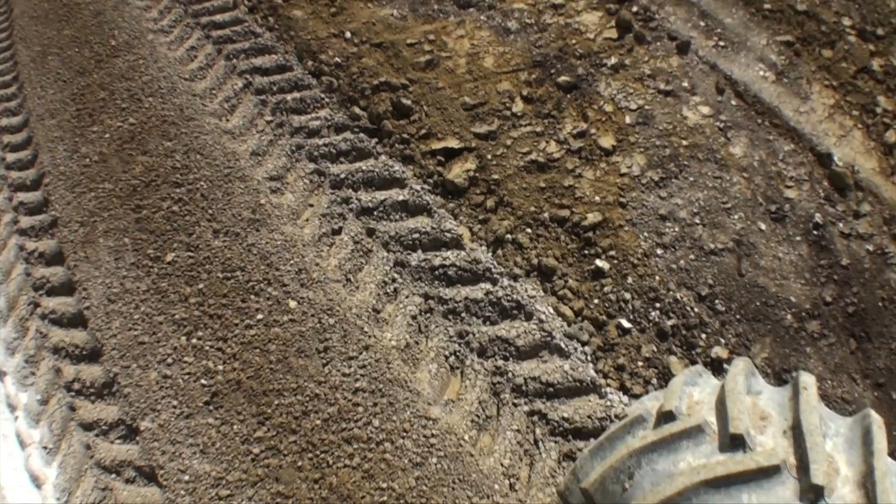Welcome to the GBB. The GBB is a quality assurance association for soil stabilization engaging in various earthwork procedures, which can be advantageous for your project. With our help, you can protect the environment and save valuable resources, as well as considerably reduce your project's duration and costs. Founded in 2004, our Quality Assurance Association is comprised of many renowned companies from all over Germany. Together, we constitute the industry's most relevant pool of expertise and experience.

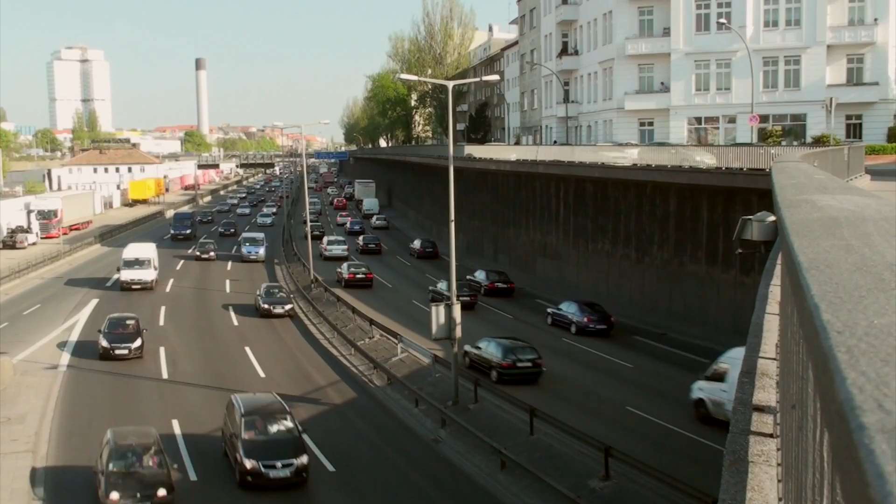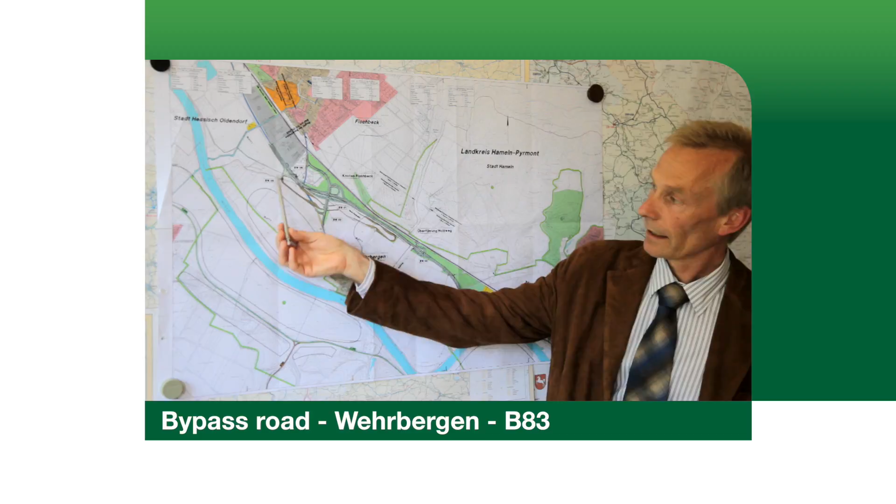With increasing mobilization and the constant expansion of infrastructure, the significance of earthworks grows. The construction of the bypass, Wehrbergen, perfectly illustrates the environmental and economic advantages of soil stabilization methods.

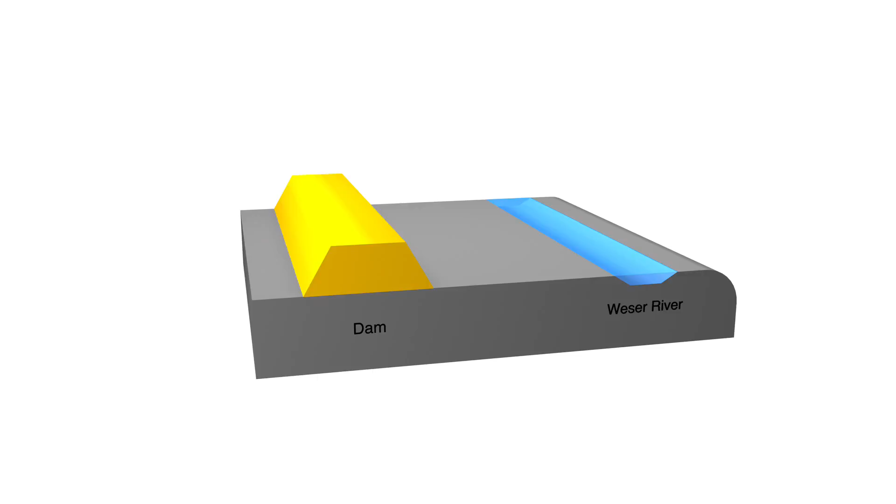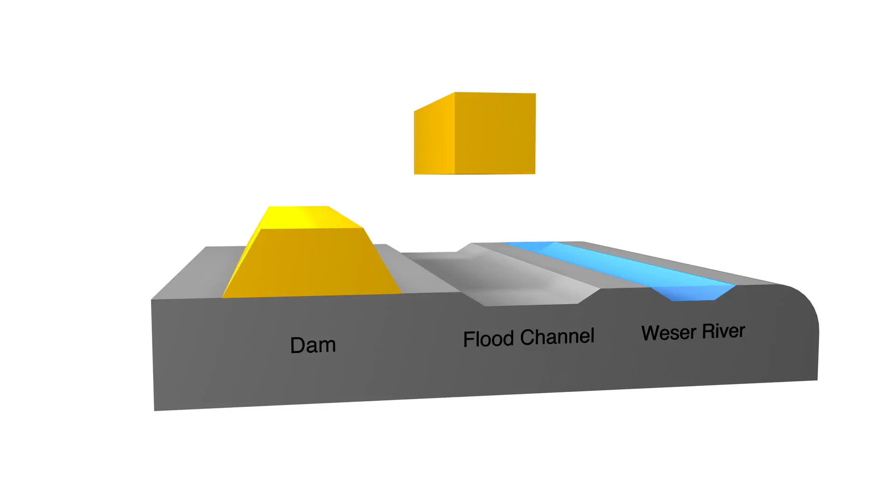In order to relieve Wehrbergen of its traffic situation, we built a bypass 3.2 kilometers long. This bypass runs very close to the Weser River, so we had to build a dam and a flood channel for protection. The building of the dam required 272,000 cubic meters of soil. The soil gained from digging the flood channel came to about 140,000 cubic meters, but unfortunately its quality wasn't good enough to be used for the construction of the dam.

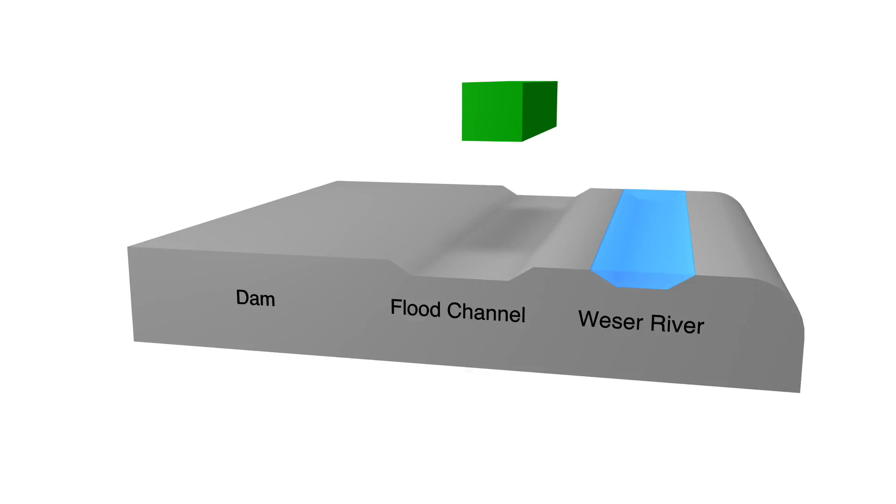We had received many quotes proposing the reuse of the flood channel material. Finally, the executing company added a binder to the soil coming out of the flood channel and incorporated 100% of it into the construction of the dam. This meant for us that we met the anticipated deadline and reduced the total construction cost of 6 million euros by 2 million euros. That was very impressive.

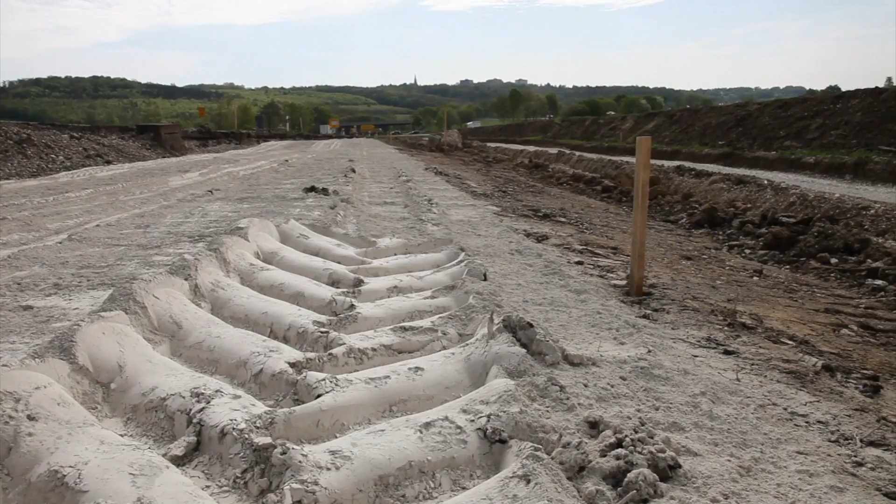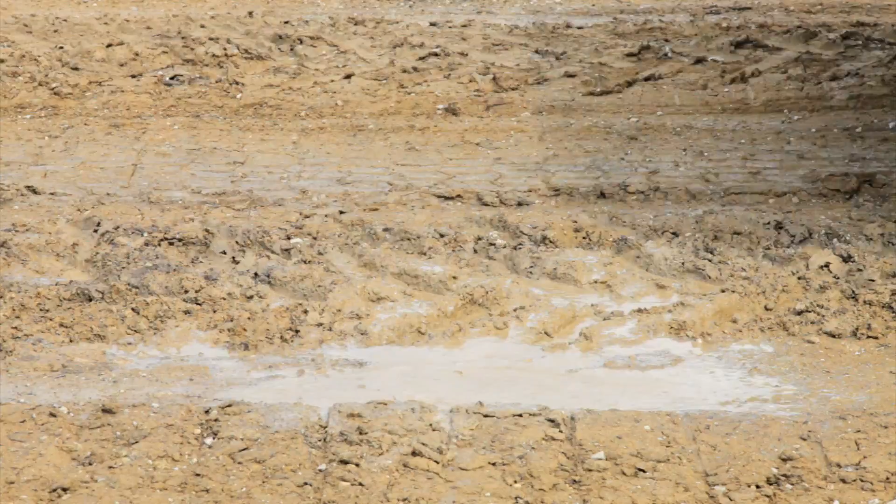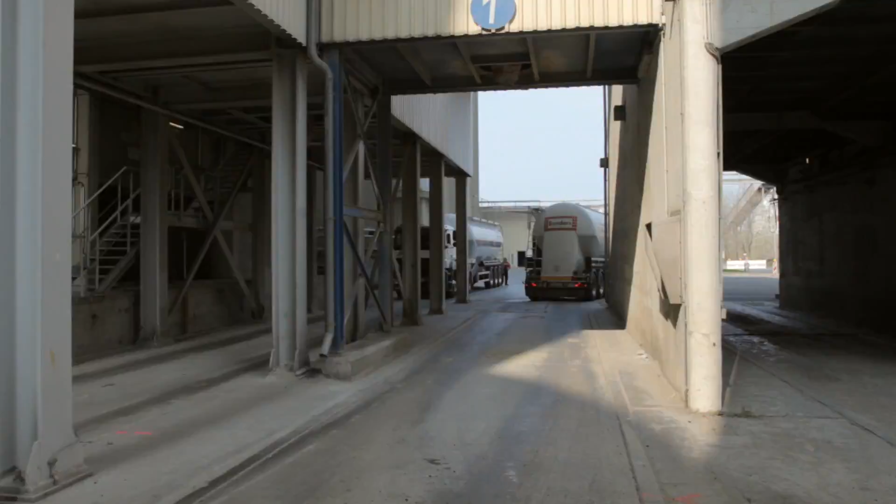The mixing of a binder into the ground is known as a method for soil improvement and soil stabilization. These methods aim to significantly alter the soil's properties, making it applicable for earthworks. This is how it works. The quality of the binder and timely delivery to the construction site are crucial for success. The GBB pay particular attention to where the binder comes from and whether it's of the highest quality.

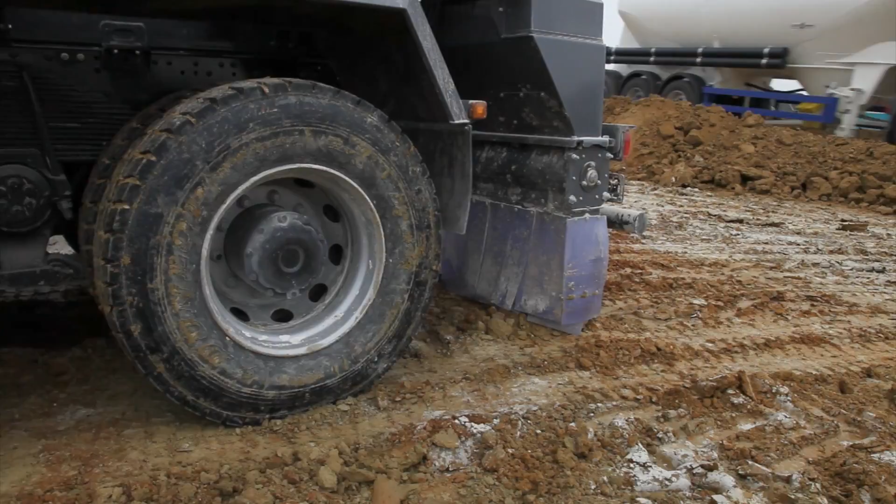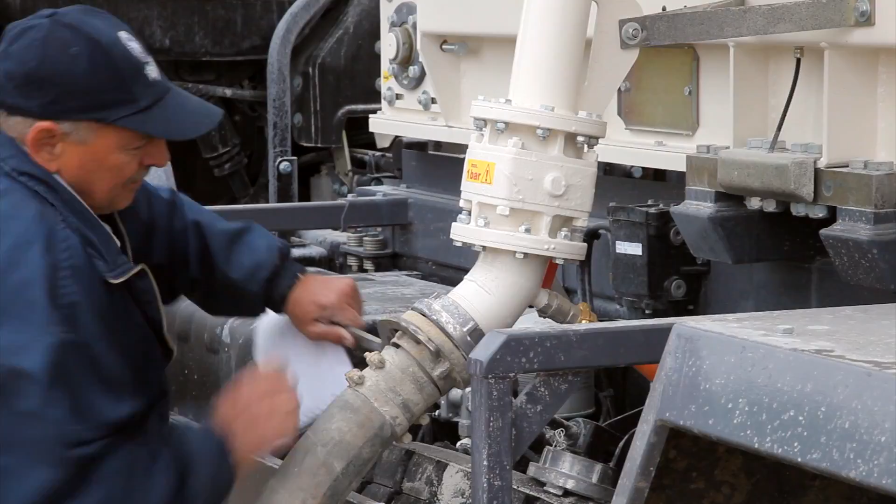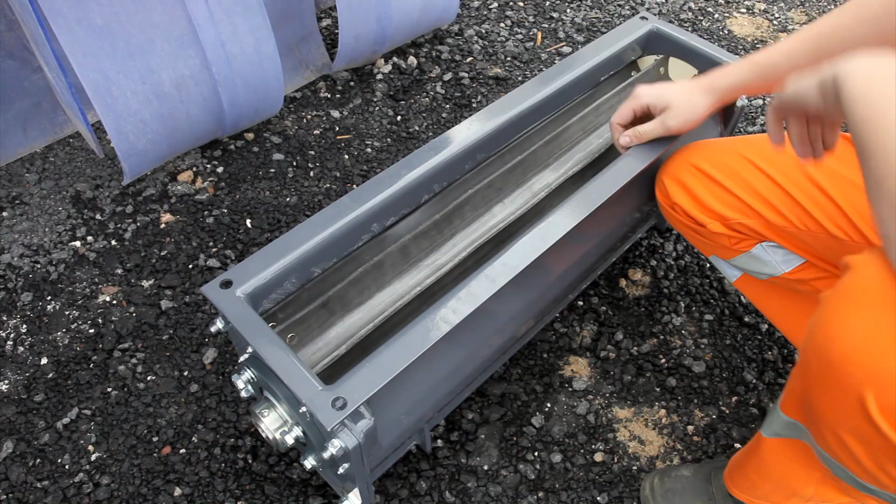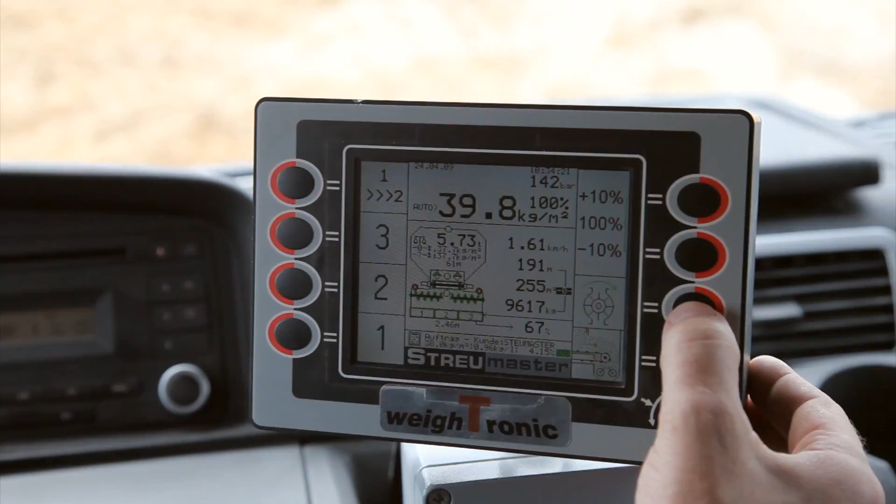Once delivered, the binder is transferred to a spreader truck or trailer by compressed air. Three self-cleaning adjustable rotary feeders distribute the binder over a width of 2.4 meters. The amount of binder dispersed can be precisely regulated according to the characteristics of the soil. A stabilizer evenly mixes the binder with the soil and makes it considerably more firm.

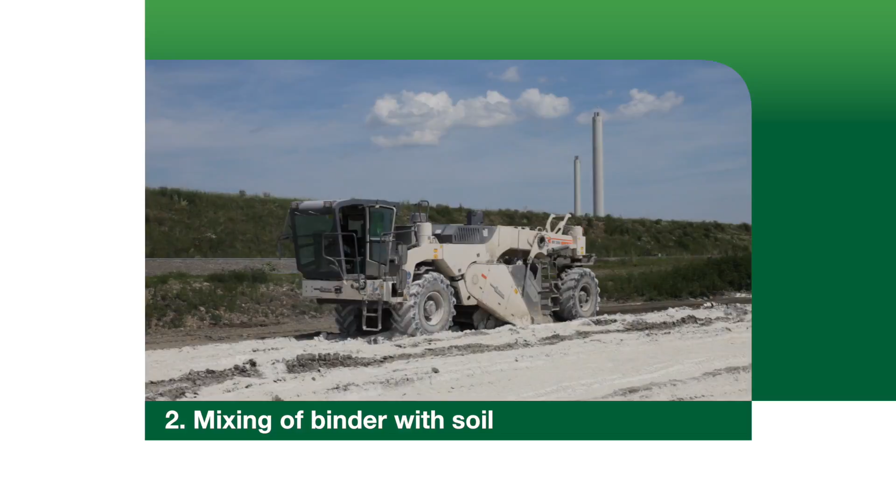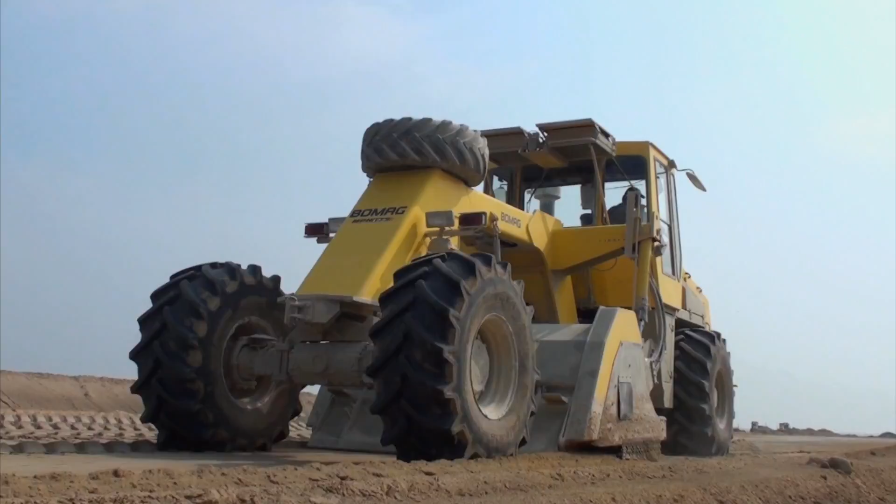Repeated in layers, this procedure creates a very rigid structure, the most important foundation for roads, railways, industrial storage lots, and many other engineered structures. Depending on the size and type of project, different machinery may be used. The operating members of the GBB are equipped to meet the highest standards.

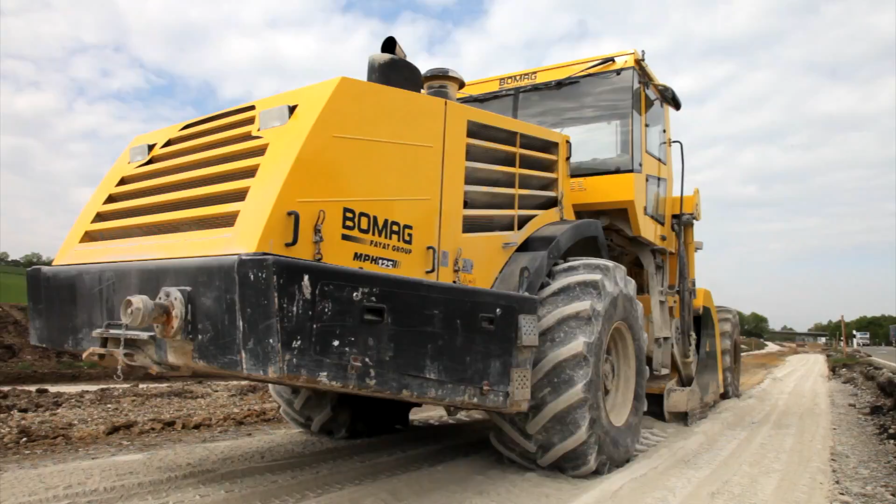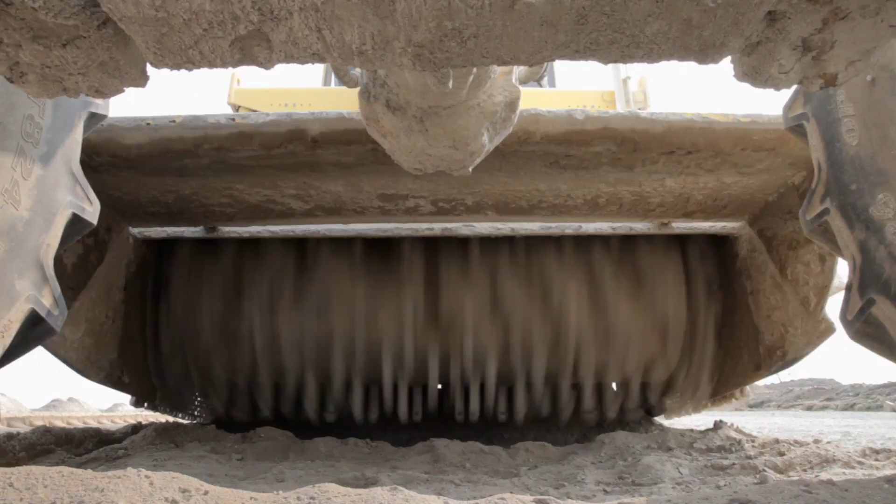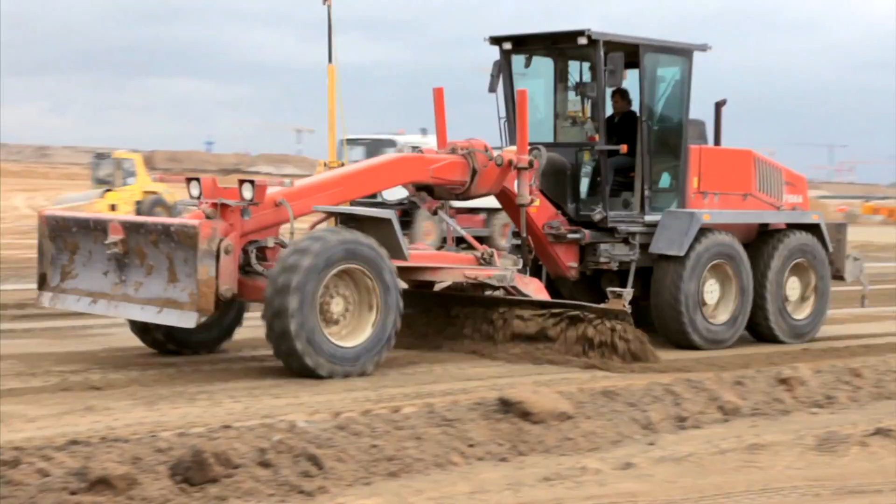After the milling process, the binder reacts with the soil and the effects become immediately apparent. After the appropriate roller compacts the ground, a grader develops the formation level and the ideal conditions for the superstructure are created.

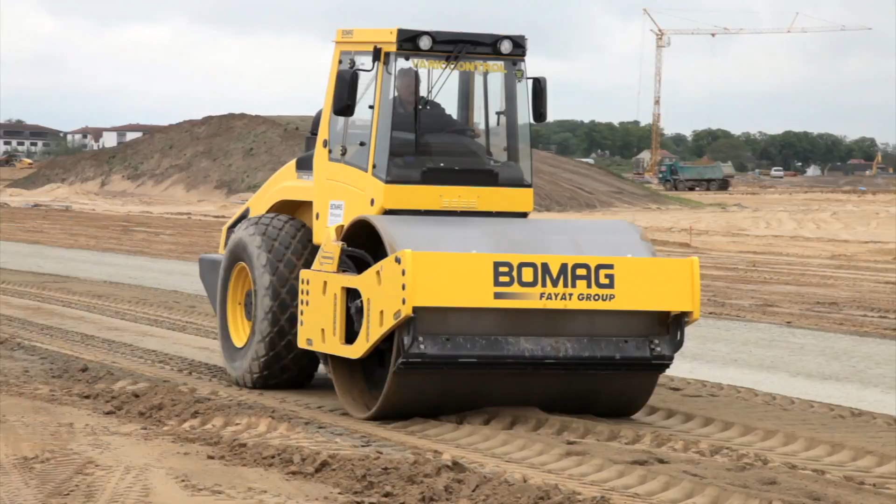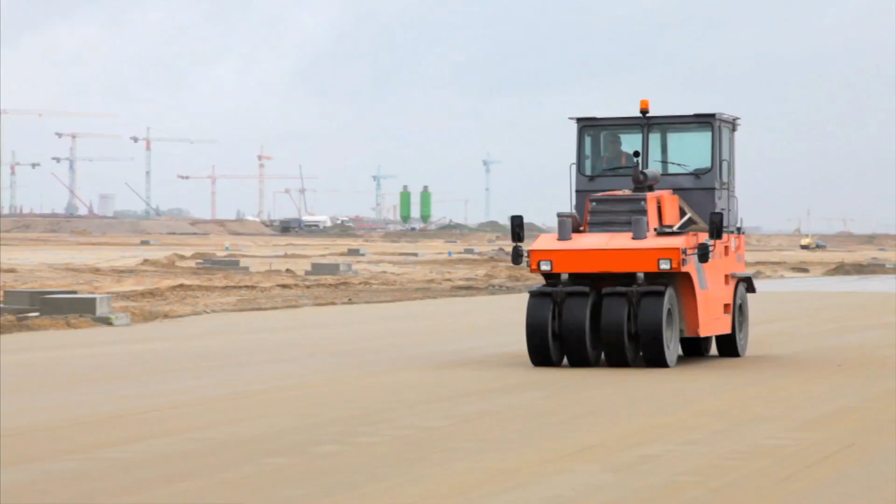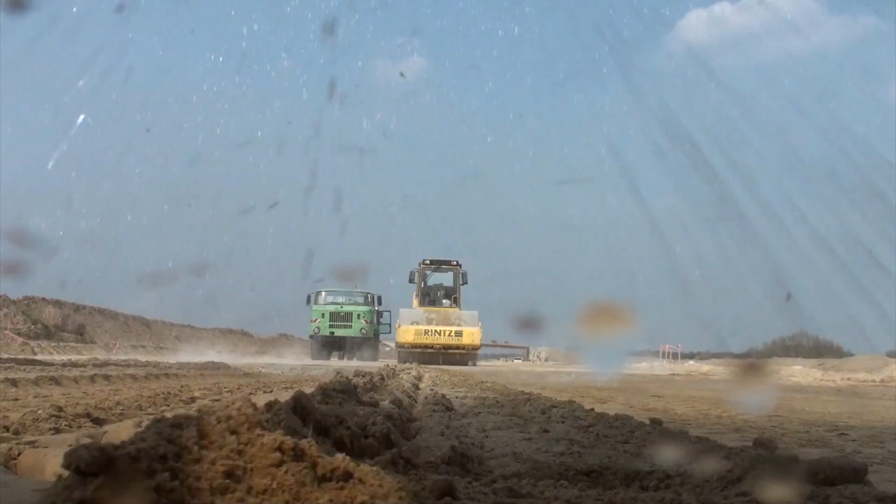Particularly when stabilizing soil with cement, an especially demanding discipline, it is crucial to bring the soil's water content to a certain level. Here, the water trucks come into action. Alternatively, water can be added directly during the milling process.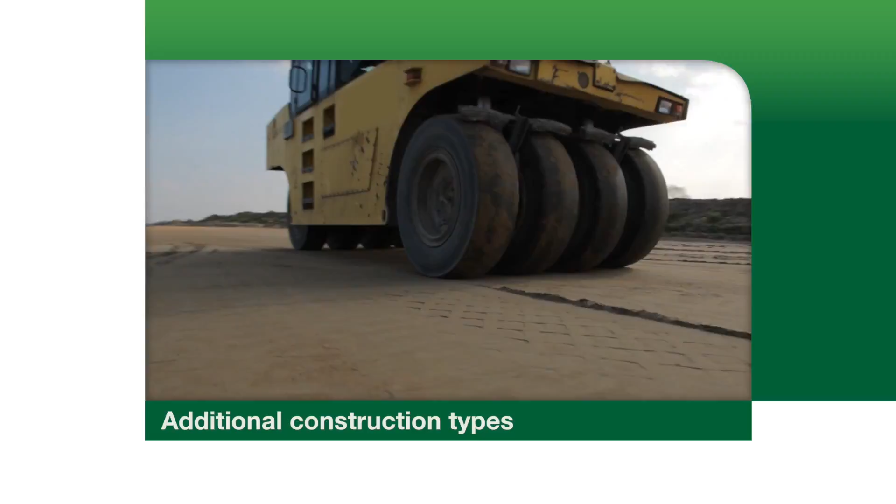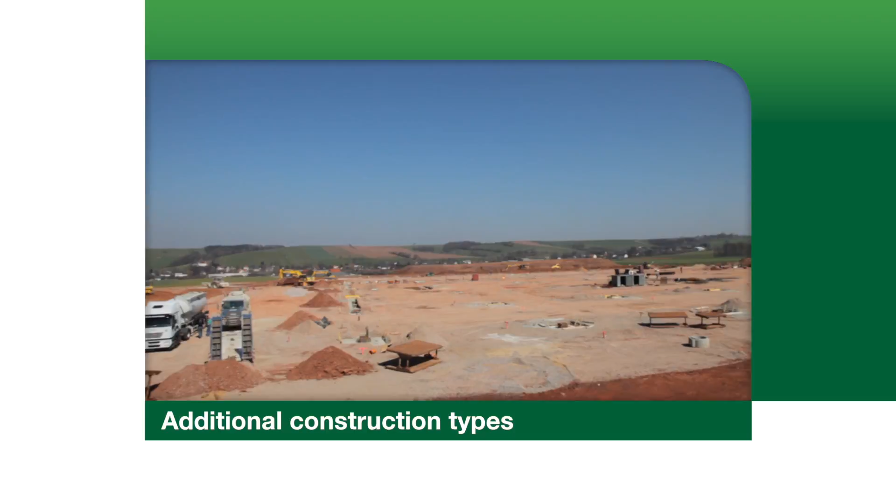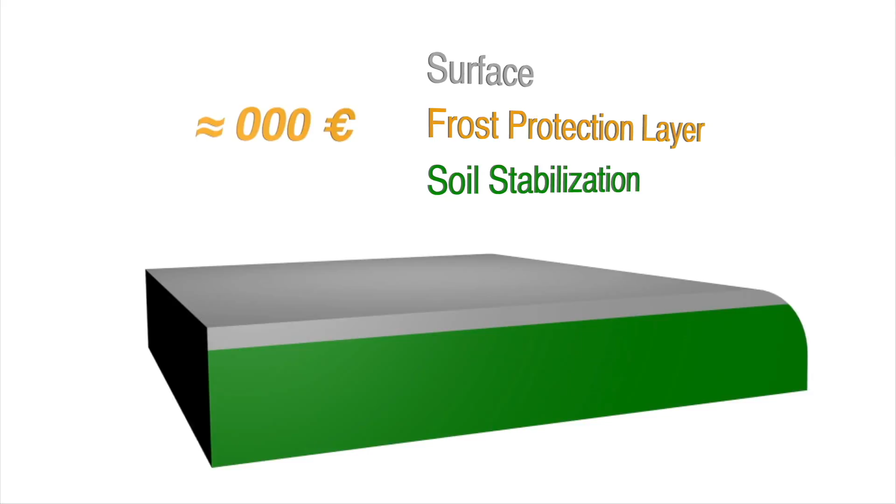When you travel this route on a train today, you'll notice you're traveling very comfortably with next to no vibrations. And because of the rigid subconstruction, the ambient noise level in the train is subtle. A foundation layer treated with soil stabilization becomes a uniform, highly stable base for superstructures. Unsurfaced roads can be made strong enough to be used frequently for heavy loads for extended periods of time. Soil stabilization saves costs by making the frost protection layer partially or completely unnecessary.

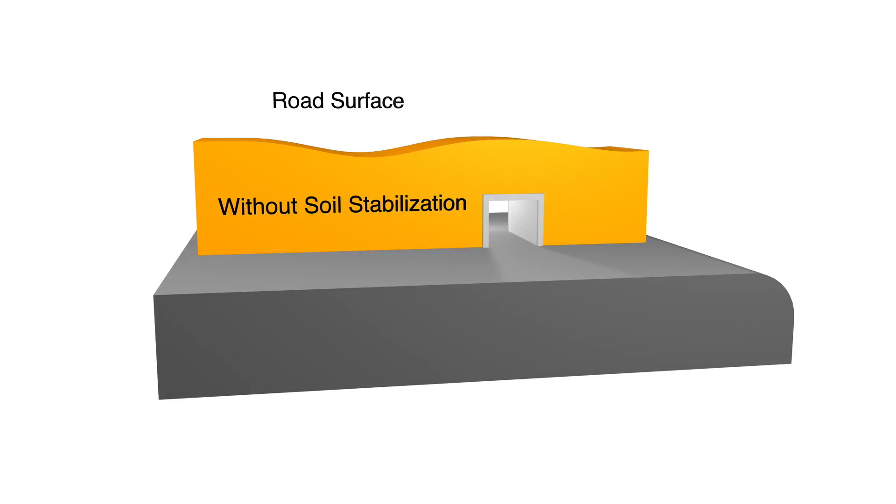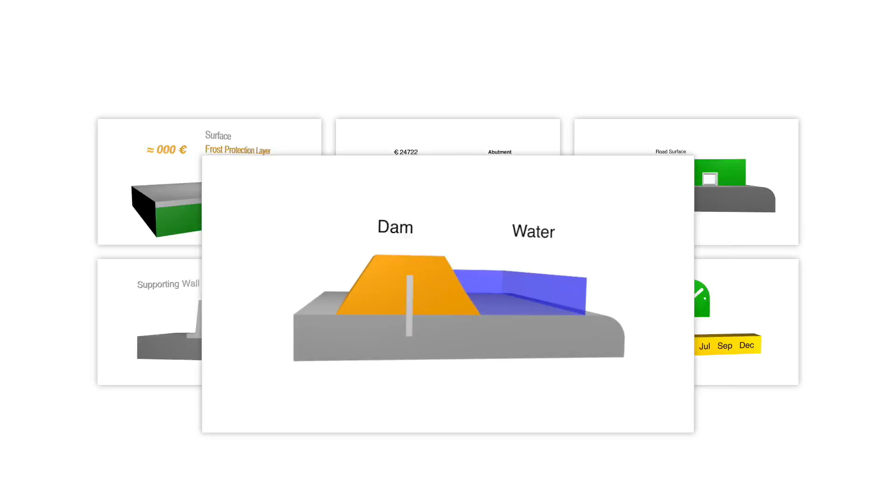Increased stability for bridges and dams. No settling of substructures. Pressure on supporting walls and pillars is reduced. Increased erosion resistance in hydraulic engineering and flood protection. Reduced duration of construction.

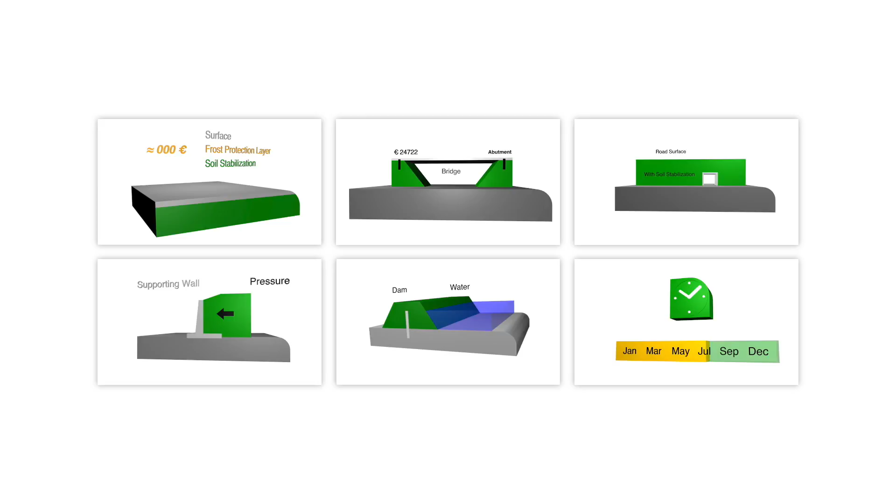How and when could you use soil stabilization for your project? We, the GBB, are happy to advise you.

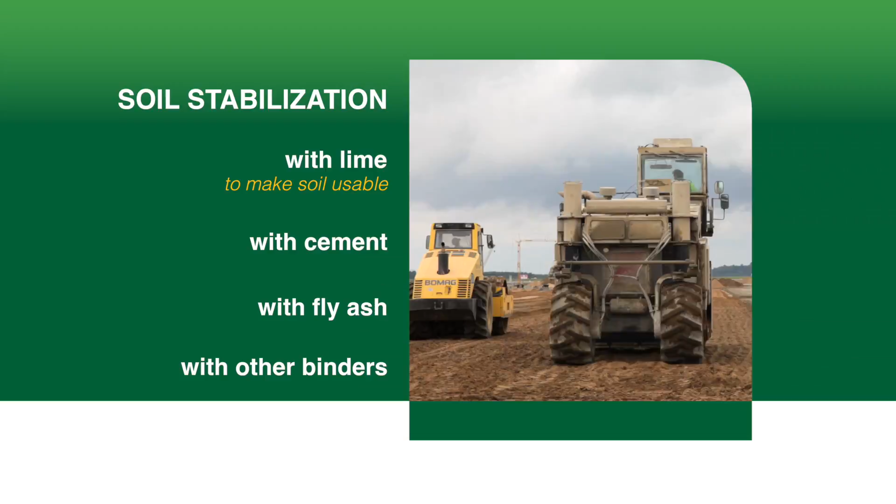Soil stabilization can be executed using lime, cement, fly ash, and other binders. Lime is usually used to make the existing soil usable. When soil contains too much water, it can't be used for earthworks. It can't be compacted. When soil is stabilized with cement, on the other hand, it also becomes more frost-resistant and firm, able to sustain heavy loads. Soil stabilization with cement must be permanently sustainable and frost-resistant.

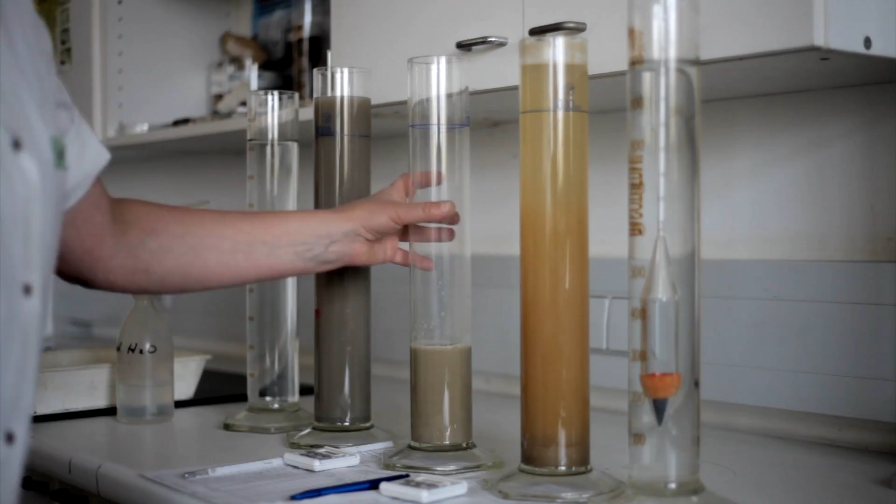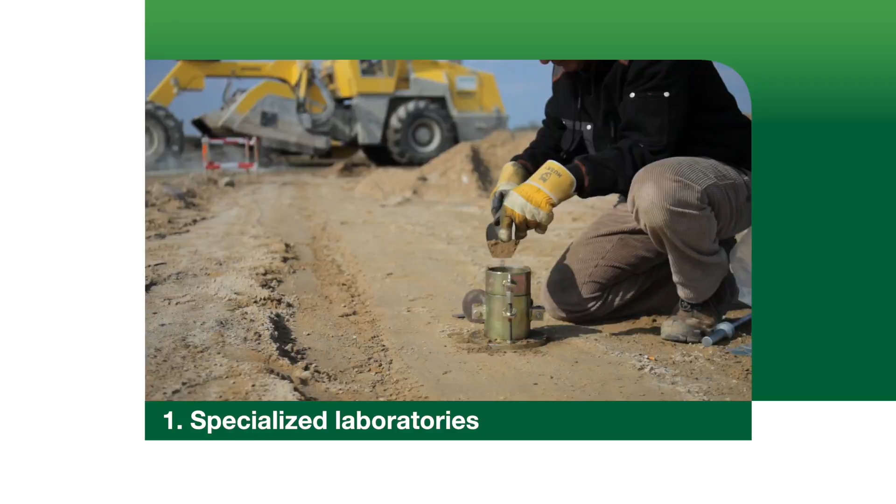As well as the operating members, the GBB is also comprised of responsible heavy machinery and binder manufacturers and specialized laboratories. The results of various analyses determine the way the soil should be treated. A specialized laboratory specifies the kind and amount of binder to be used. This step is crucial in assuring the treated soil's optimal attributes and high quality.

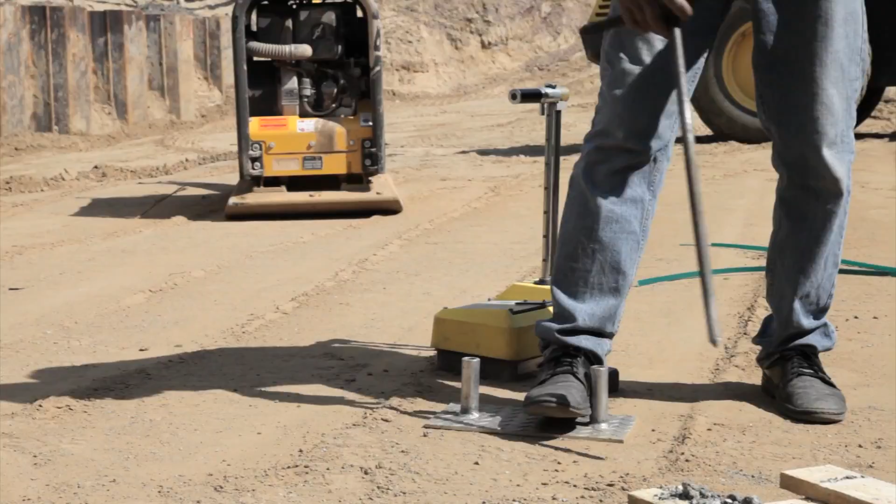It is important to classify the existing soil. Once classified, the laboratory's tests are assigned. The water content level is very important, as well as grain size distribution and the Proctor test. The water content level is very important because only at the correct level can the soil be compacted properly. If the level is too high or too low, the ability to compact the soil decreases dramatically.

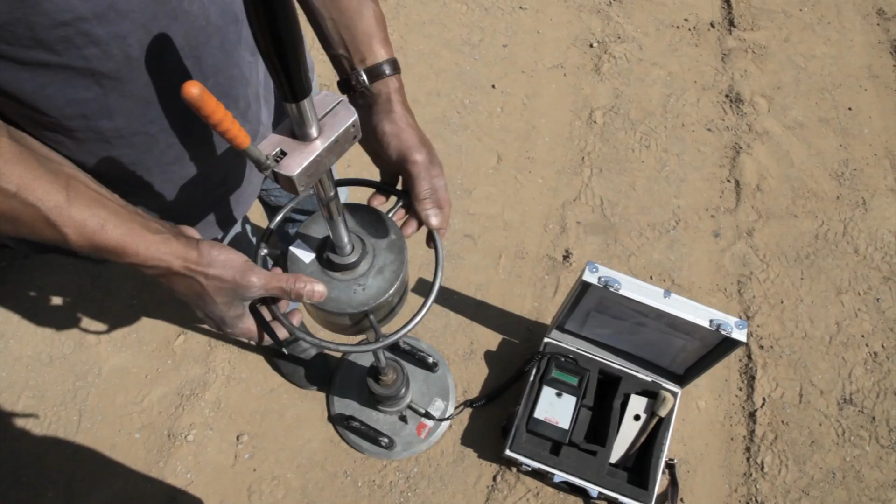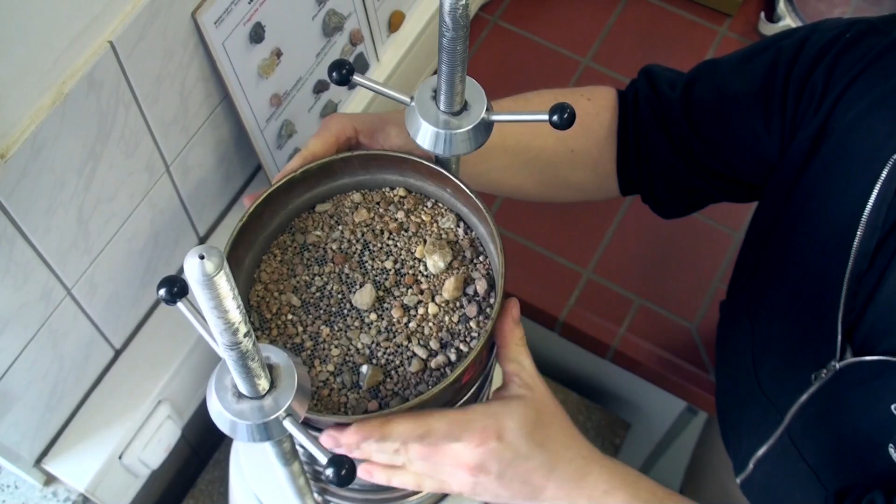When the grain size distribution is known, conclusions about the type of soil can be made. In order to determine the grain size distribution of the existing soil, samples are sifted through a number of sieves with different sized pores. The content of each sieve is weighed and summarized in a diagram.

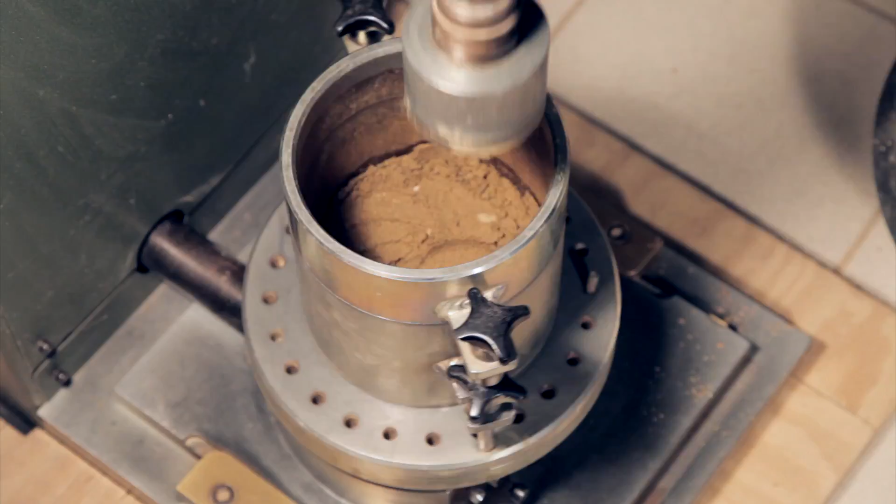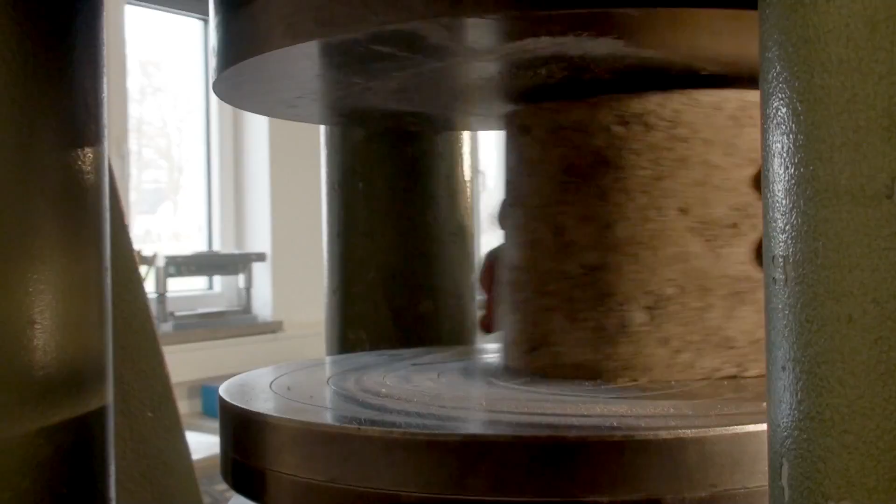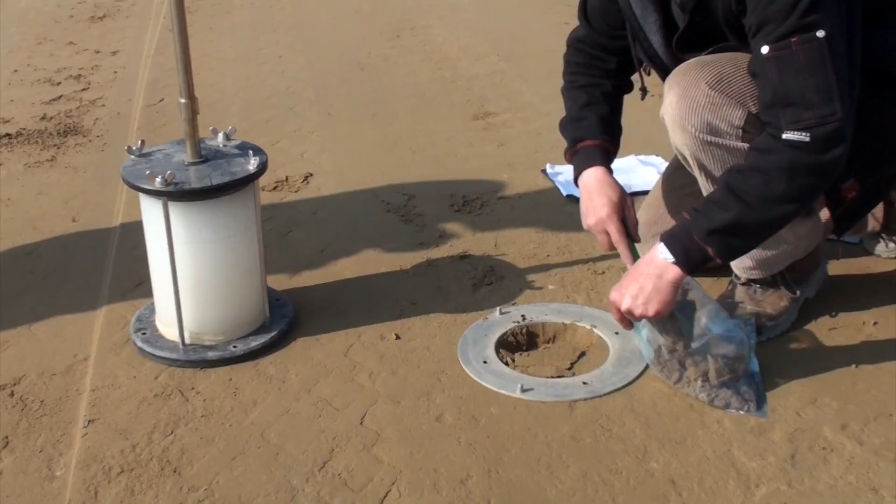The fabrication of a soil and binder specimen is called the Proctor test. The soil samples are mixed with the appropriate binder, then compacted and stored. After allowing the specimen to settle, we can determine load capacities, shear loads, and frost resistance. Even during the construction period, a laboratory repeatedly reviews results. This way, adjustments can be made in accordance with changing weather conditions, and the best possible quality can be assured at all times.

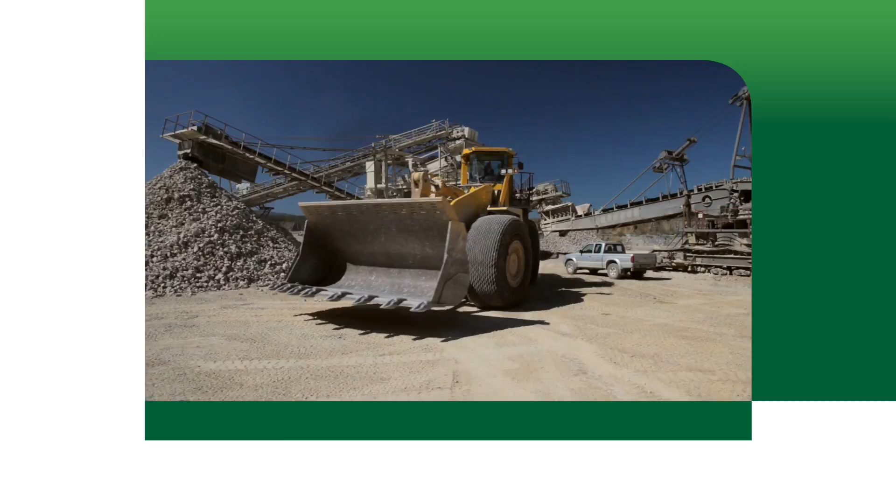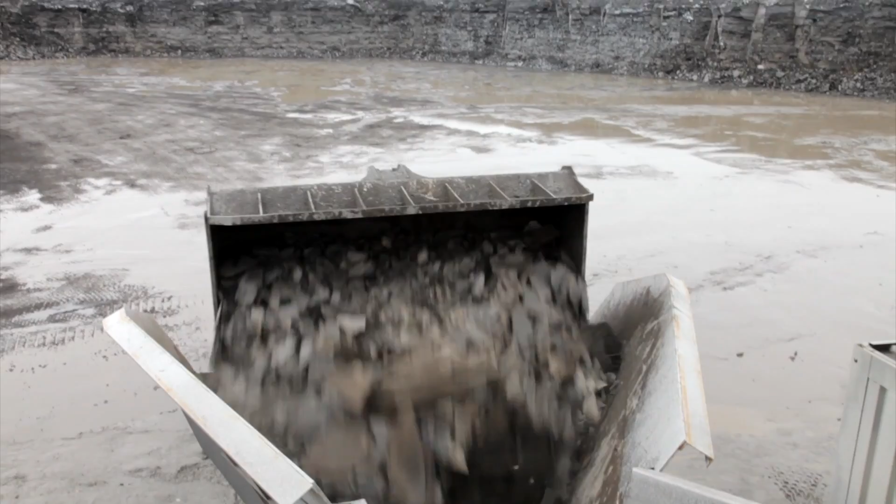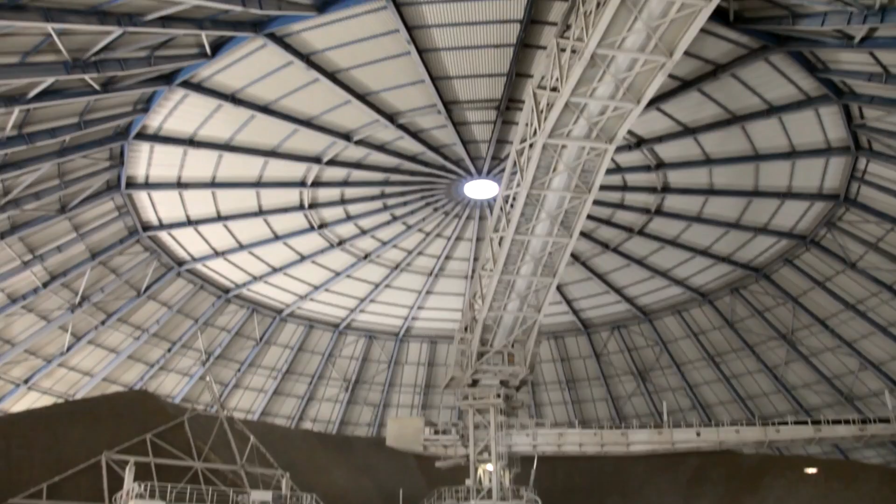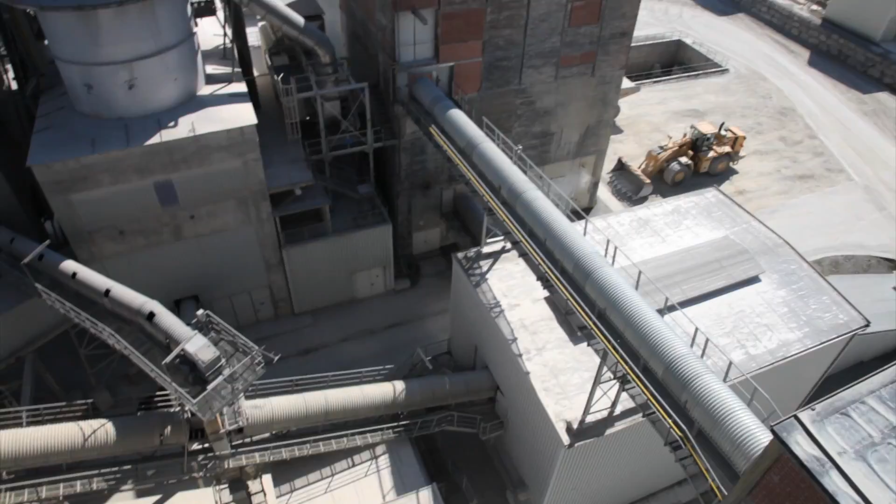Our binder suppliers have their own raw material resources of the highest quality. Special mining and production technologies ensure the highest level of purity and quality of its products. For the production of binders, such as lime and cement, the raw material is calcined in a kiln. Temperatures between 900 and 1200 degrees Celsius are required. The natural resource limestone becomes quicklime, which satisfies the highest quality requirements. The engagement in research, development, and especially environmental protection is an integral part of these firms.

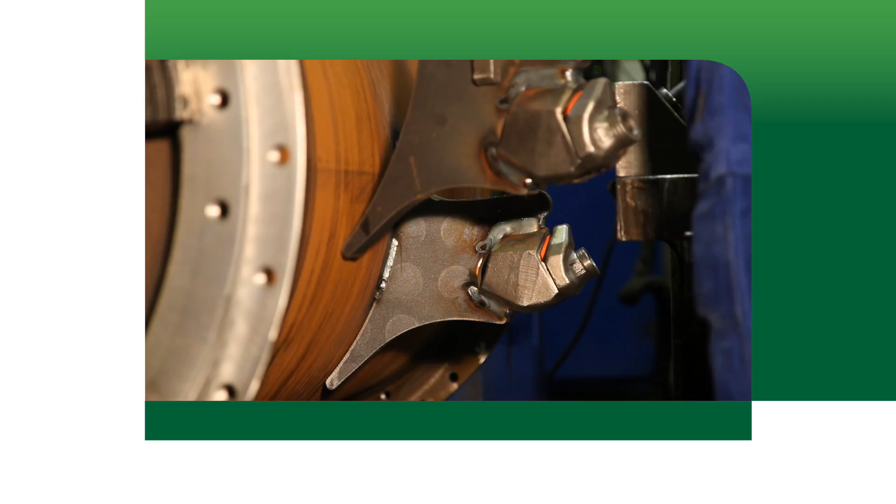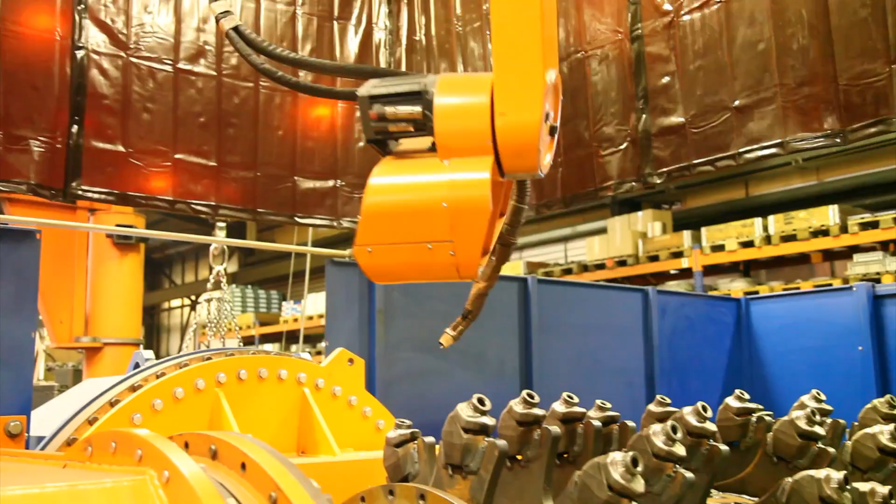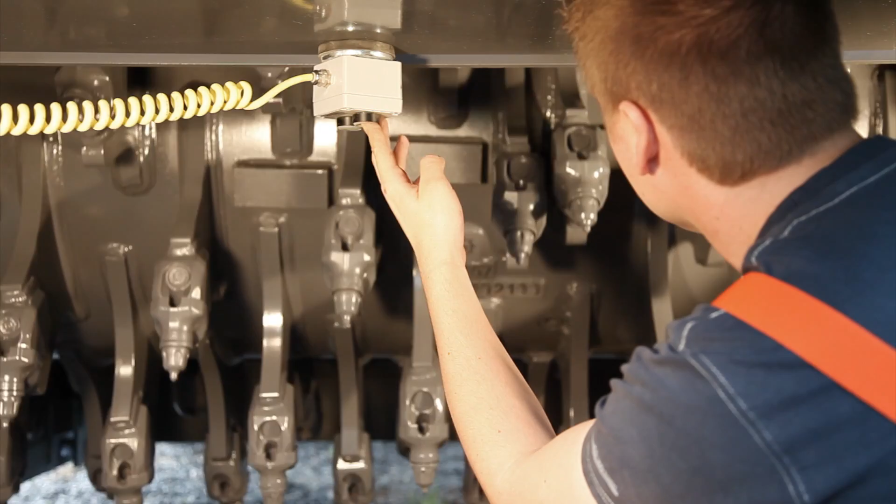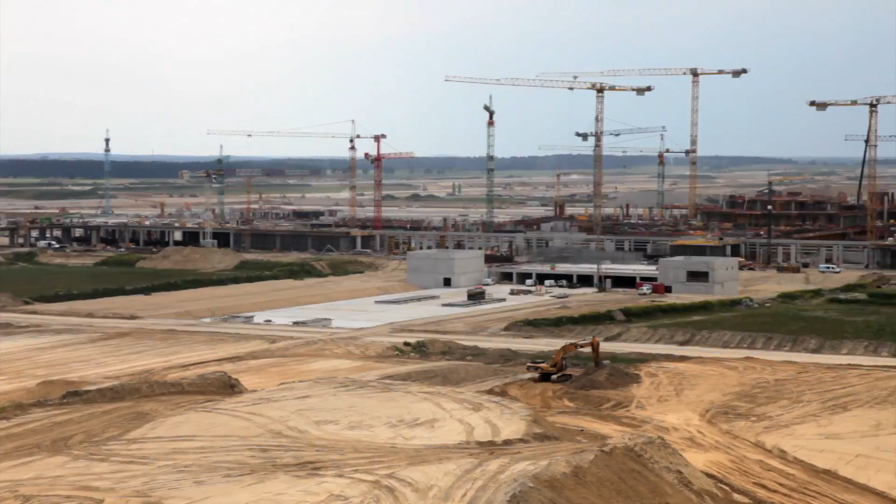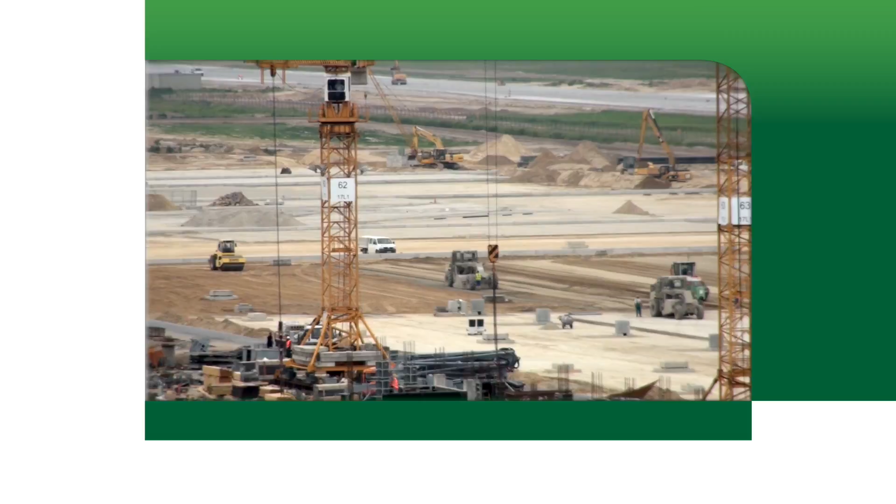We are here on one of the largest infrastructure projects currently in progress in Germany. We are at the construction site of the future Berlin-Brandenburg International Airport. On an area of about 2 million square meters, various types of soil stabilization are being executed. The client, the Airport Association Berlin-Brandenburg, already made the RAL seal of quality mandatory for all firms applying during the contracting process.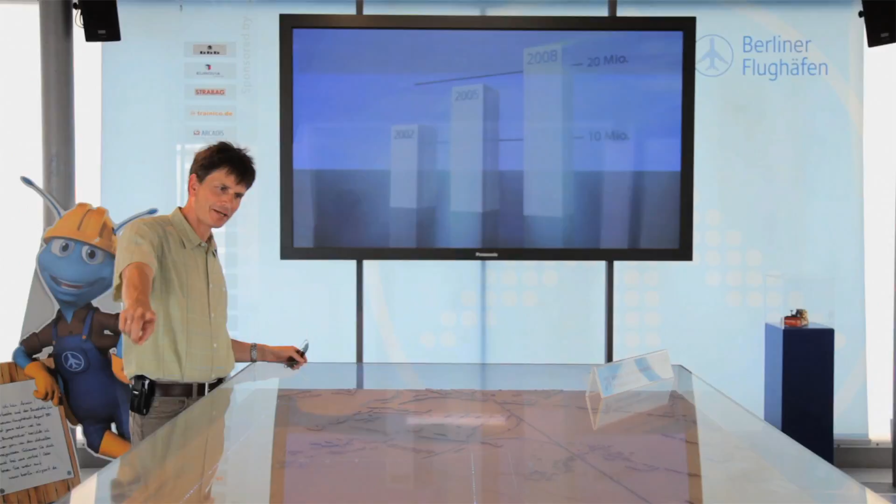If you have no room for failures on your construction site, make sure the contracting firms bear the RAL seal of quality. We take responsibility for quality, innovation, advanced education, plus environmental and health protection.